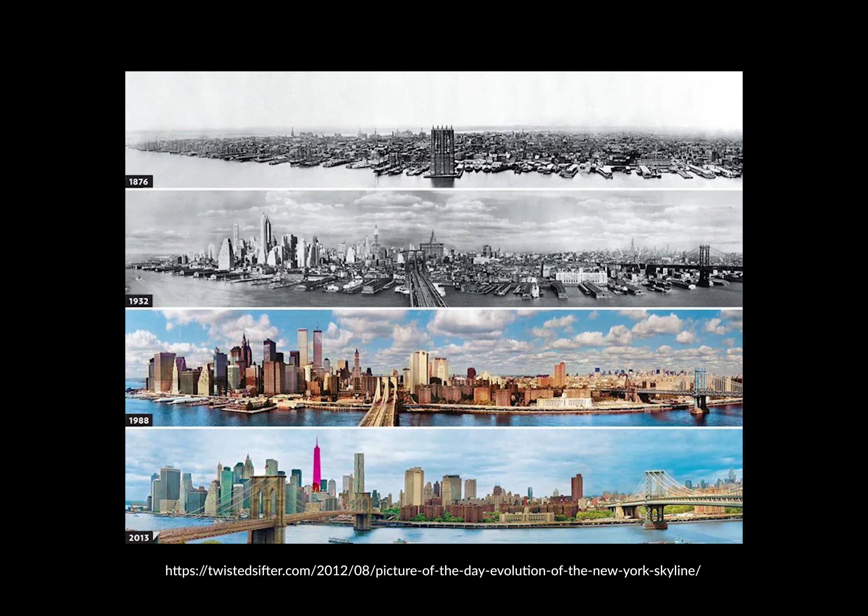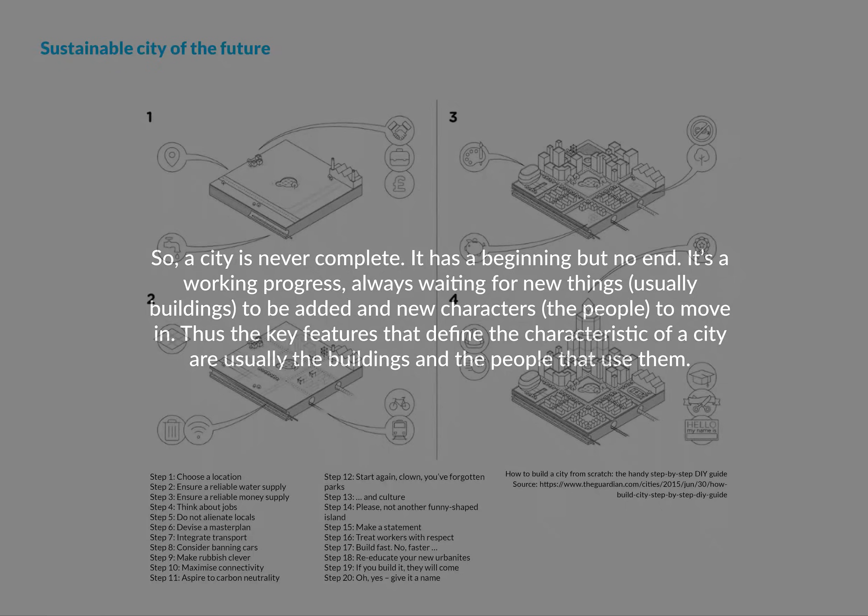Throughout history, the criteria for a city's development has evolved, but it is usually affected by social, political, environmental, economic, and technological advancements. Thus, there has been an overall evolution in terms of a city's land use. So, a city is never complete. It has a beginning, but no end. It is a work in progress, always waiting for new things, usually buildings, to be added, and new characters, usually the people, to move in. Thus, the key features that define the characteristic of a city are usually the buildings and the people that use them. These series of illustrations are part of a 20-step DIY guide for building a city from scratch. We're so good at it now.

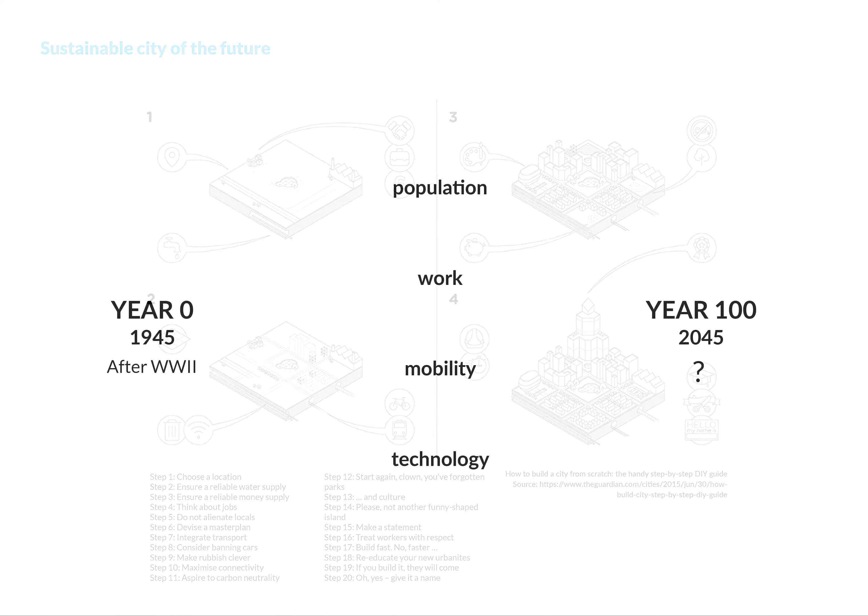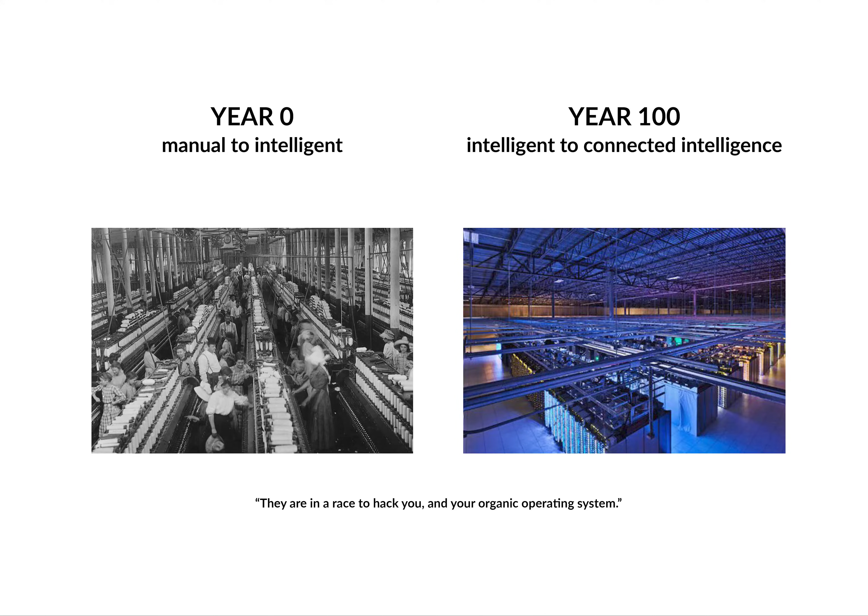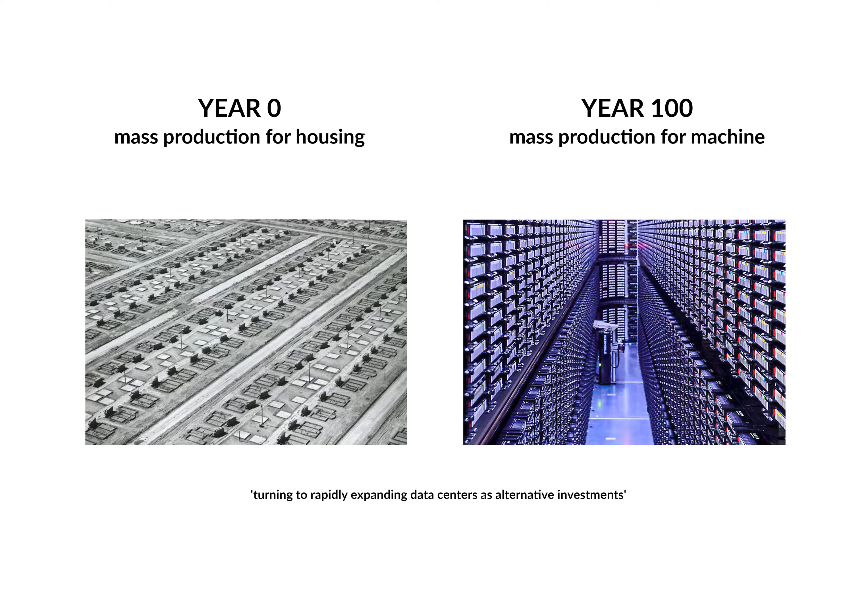In a historical context, my thesis employs a year 0 to 100 concept, which considers worldwide criteria for city development since the end of World War II in 1945, signifying year 0, and 2045, signifying year 100. The first few years after World War II saw the widespread of manual labor jobs and factory workers. However, our current trajectory is evidently leading us to an era of artificial intelligence. We started with dual-dimensional mode of transportation, but now we are thinking of flying cars and underground tunnels. And finally, the post-World War II years enhanced the mass production of housing, but now we are looking toward mass production of machinery and data storage centers.

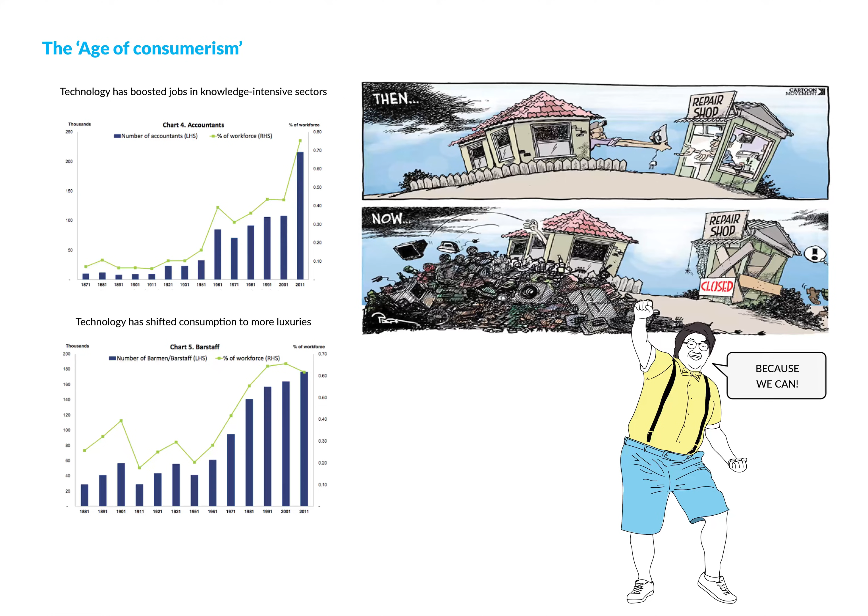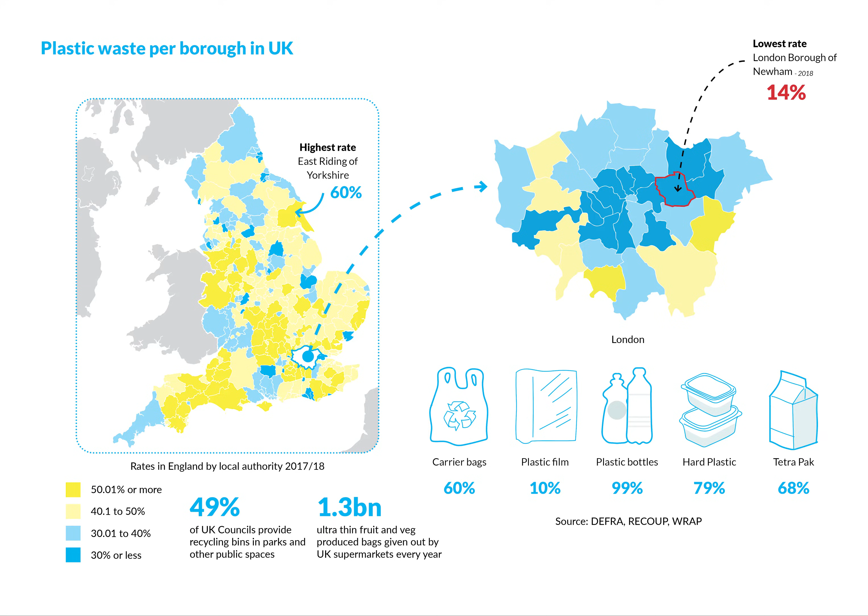Now, unfortunately, advancements in technology has also played a major role in what we now know as the age of consumerism. Simply put, we buy and throw away because we can. So the understanding is that individuals can now produce even more waste in one lifetime of consuming products than ever before, such that British households now produce an estimated total of 26 million tons of waste annually. Now, in that regard, plastics are still one of the most problematic household waste that is still being produced, with this diagram showing how many UK councils still struggle to recycle their plastics, Newham Borough being the least in 2018 at 14%. All this is a single branch of the issues that have now led us directly to the declaration of the climate emergency, with the prioritization of recycling as a mitigation strategy.

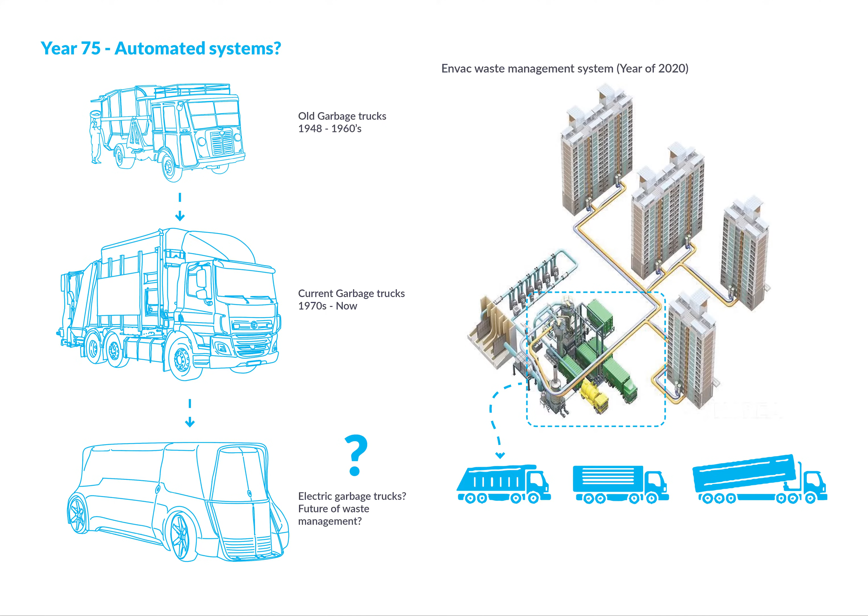So thinking of solutions, and as we edge towards a future of electric-powered garbage trucks, my thesis considers the potential of automated waste management systems in new master plan projects. Here are a few concept images illustrating my initial thought process.

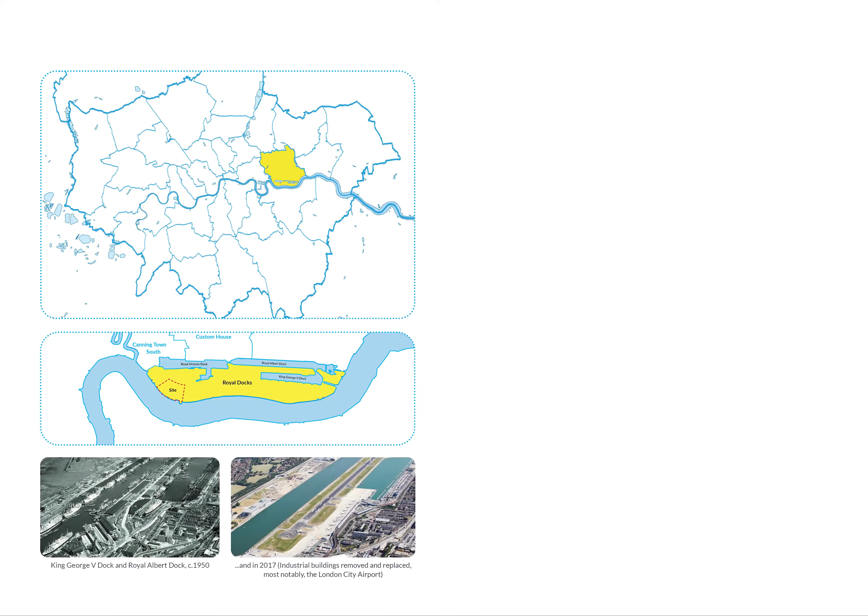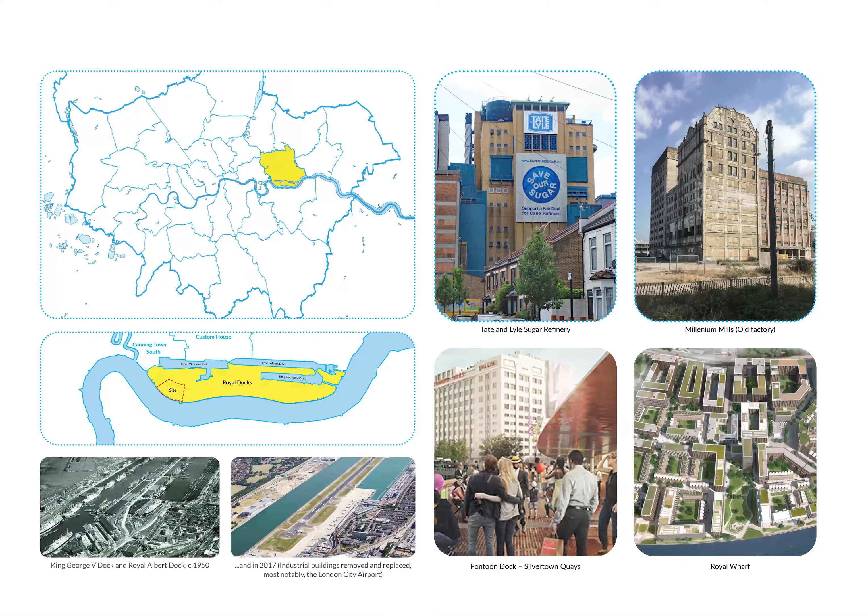The Supermix proposal. The site is in Newham Borough, but specifically the Royal Docks, which has a significant industrial heritage, where buildings like this turn into buildings like this, and then get acquired and turned into schemes like this. Now, this process is understandable in relation to the inevitable expansion of London outwards into Zone 3 and 4, also where this site is located.

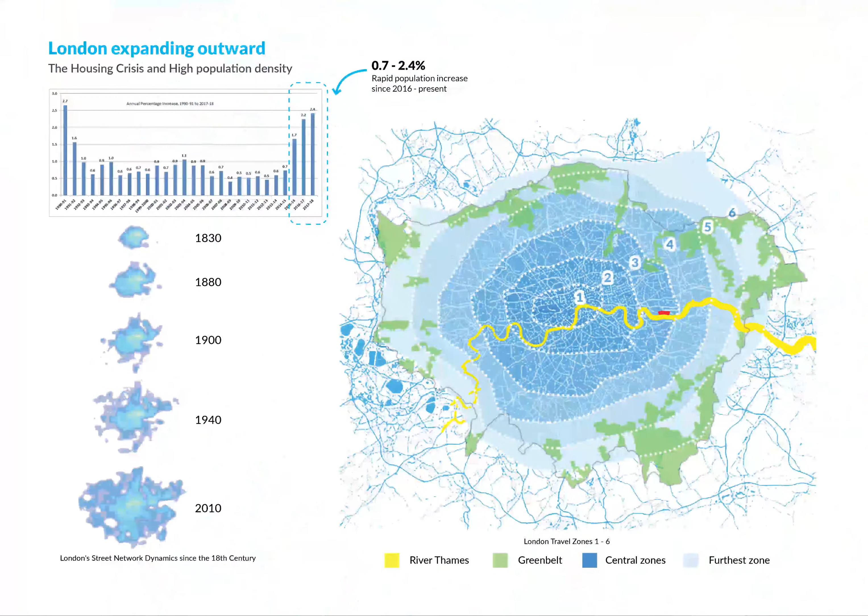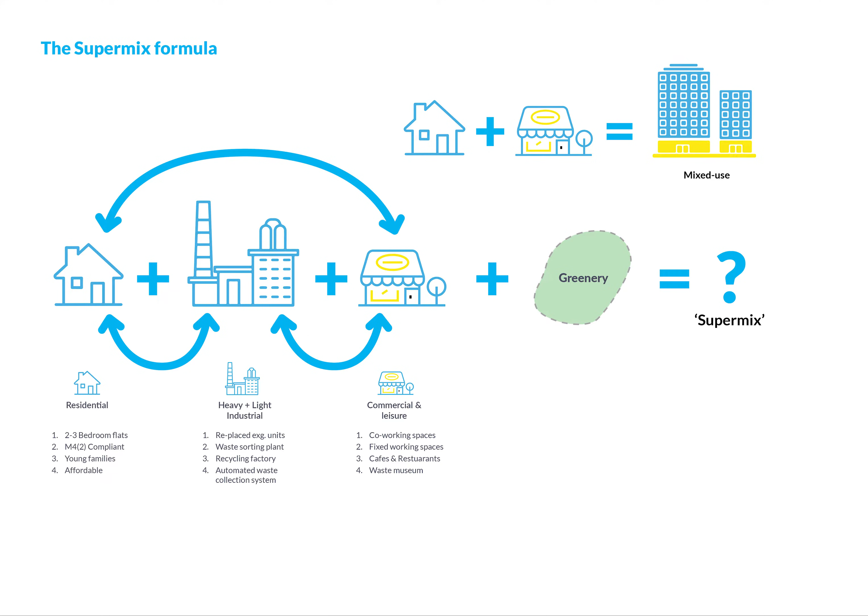Typically, such schemes comprise of residential and commercial buildings. However, this thesis theorizes a supermix. This refers to a concept that aims to include industrial uses in the same ratio as the typical mixed residential and commercial uses, but centered around automated waste management systems.

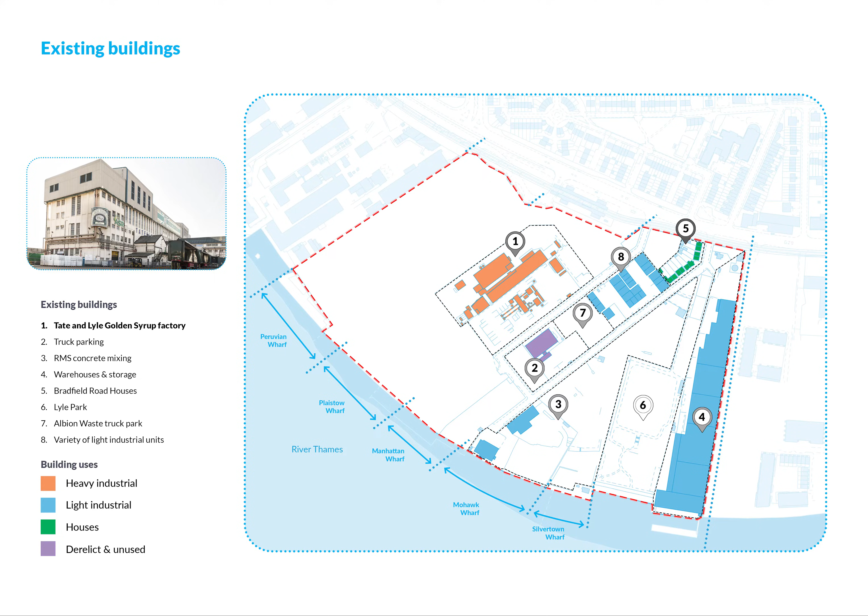The site has a few existing and derelict buildings, but most notably a Tate & Lyle golden syrup factory, which has been assumed to be acquired in the near future, in line with the current trends in the Royal Docks.

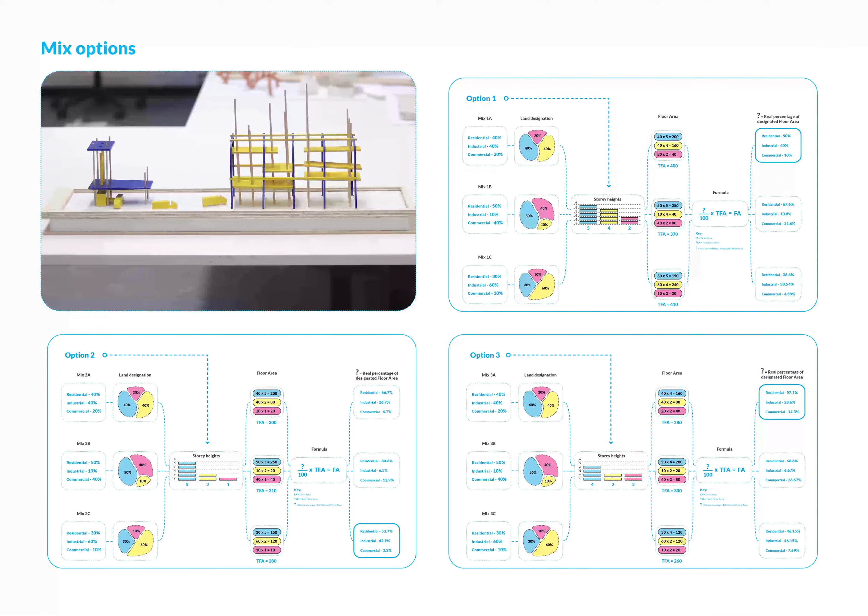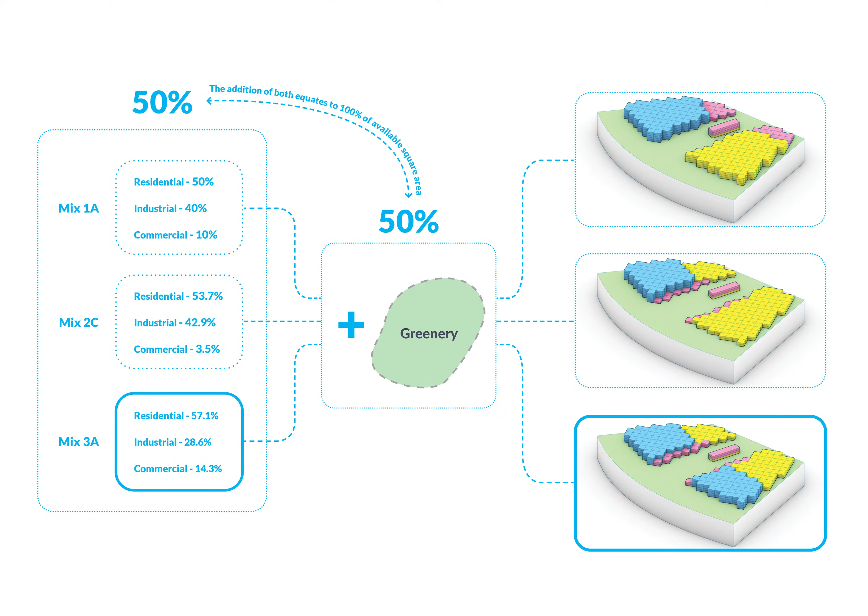After going through some mixed options, the eventual conclusion is to propose a 57%, 28%, and 14.3% for residential, industrial, and commercial uses, respectively, combined to make up a total of 50% of the site's land designation, and the remaining 50% as public space filled with lovely greenery and openness.

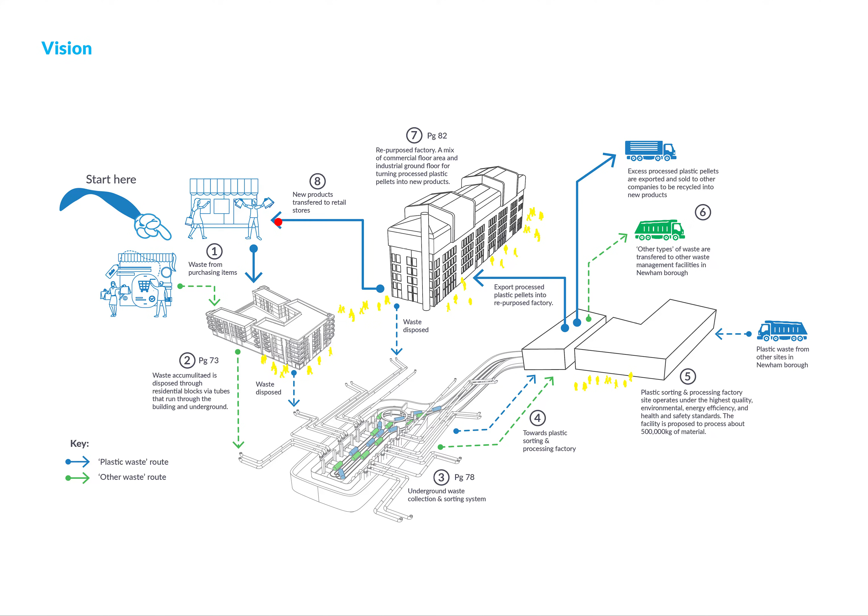In total, this thesis features 3 out of 4 proposed structures and buildings. Firstly, the residential block with the integrated waste collection system.

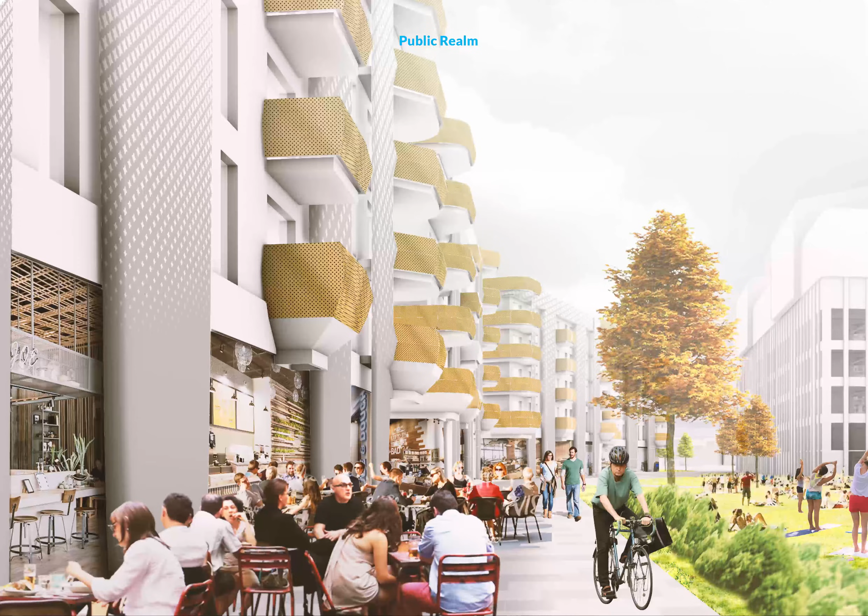The underground waste collection and sorting system, complete with a viewing gallery to showcase this technology to all who are interested.

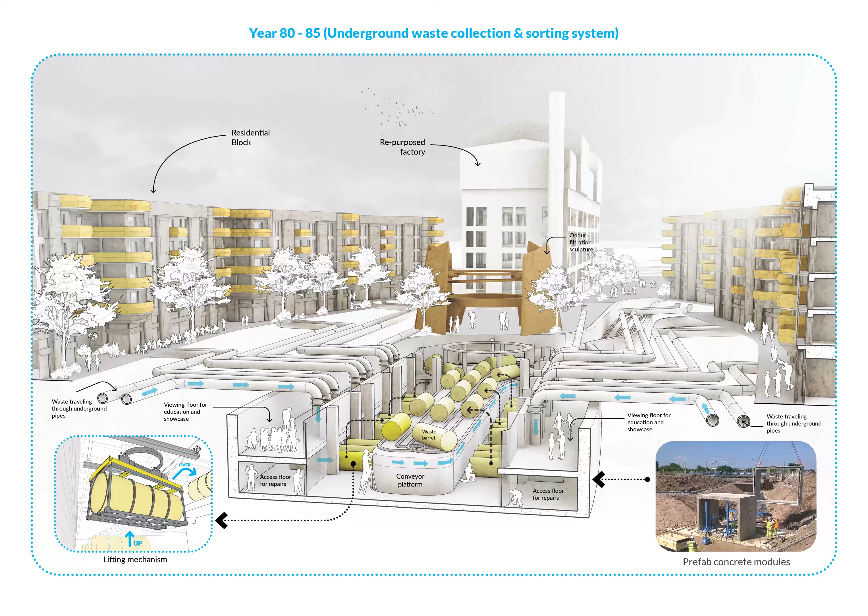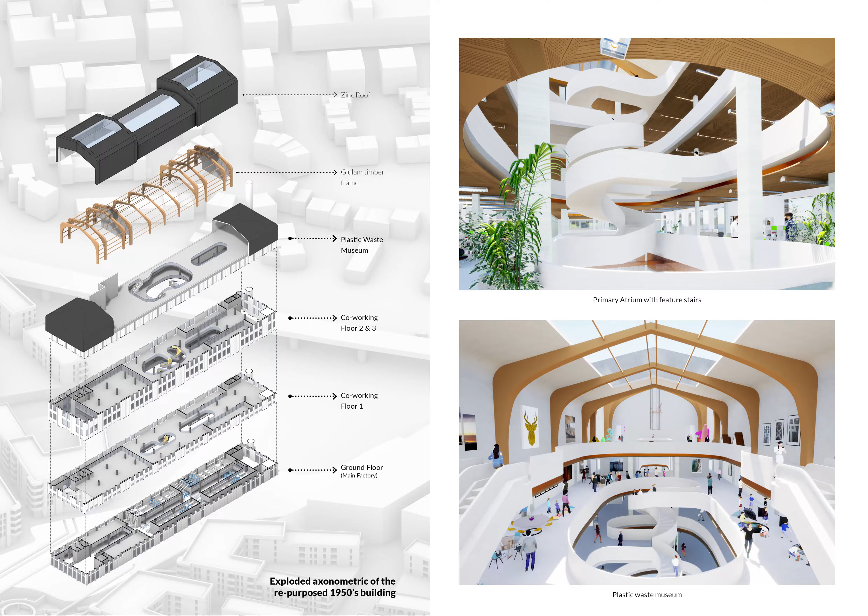And finally, the multi-level repurposed factory, which includes the factory at the ground floor level, co-working spaces on the upper floor levels, and a plastics waste museum at the topmost level, all connected by an eccentric sculptural spiral stairs as a crowning jewel within the building.

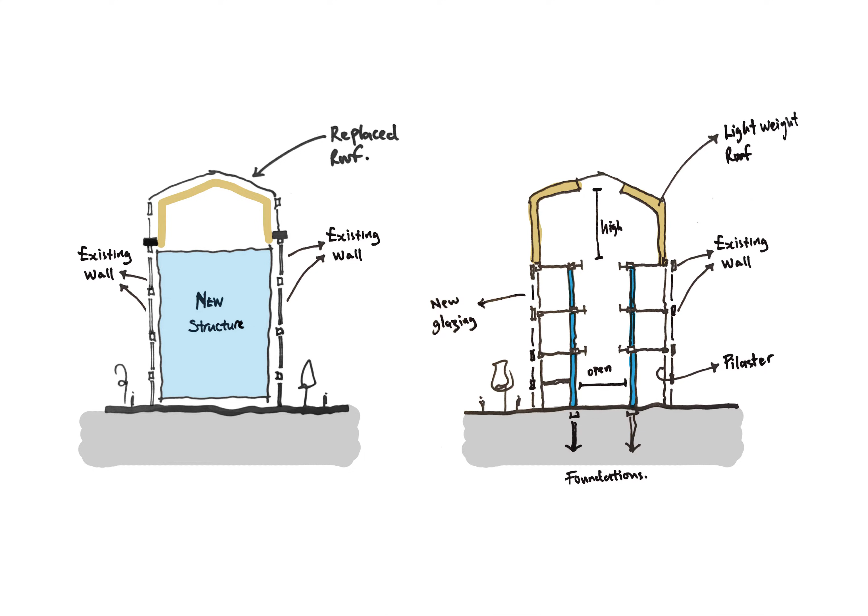In regards to construction, the aim is to retain the external shell of the existing factory only and to remove all internal floors, columns, and the existing roof. This is predominantly because drawings of the existing situation have been impossible to acquire during the process of this thesis. Thus, steel frame construction is proposed for the internal refurbishment of the repurposed factory.

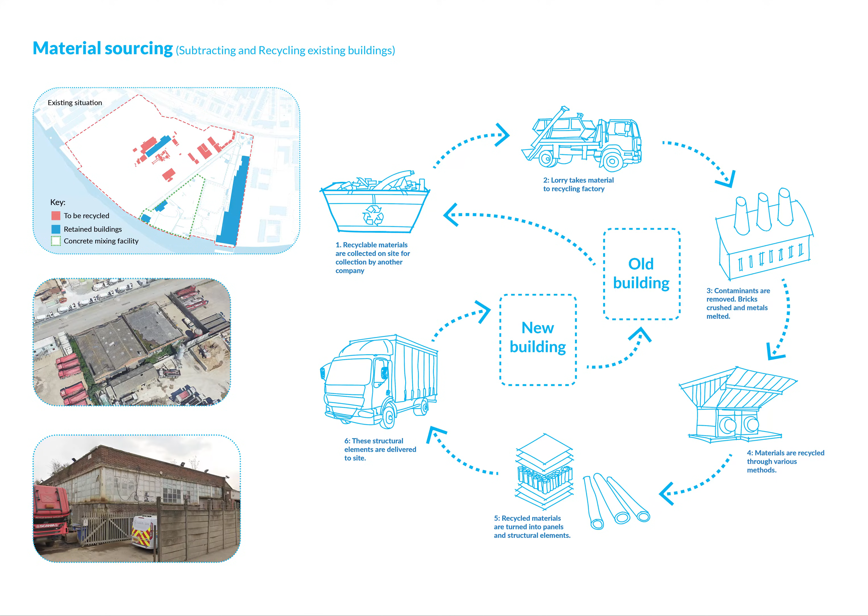Other building material, including concrete, is to be acquired from surrounding demolition sites and recycled. The roof is to be rebuilt, but to the same form as the existing in order to preserve its heritage, although it is not currently a listed building. However, structurally, it will be constructed from spruce, glued, laminated timber.

A passive ventilation strategy has been largely incorporated, predominantly for the upper floors, but mechanical ventilation for the factory at ground level, as controlling the room temperature is imperative to ensuring optimal performance from the machinery and factory workers.